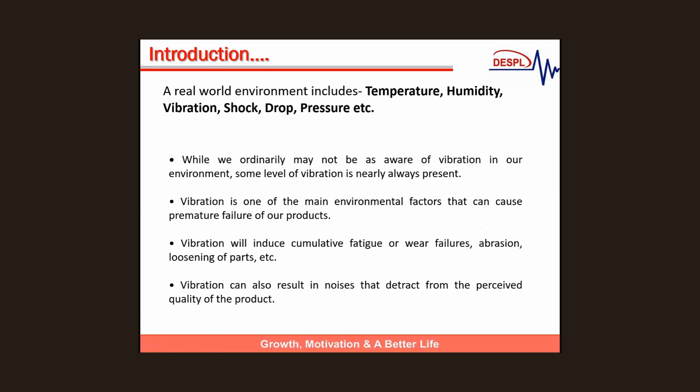Then the R&D and quality manager, the concerned persons over there, called us and discussed this problem they were facing. We have very big issues nowadays because we have produced thousands of bikes, and everywhere we go we get this complaint from our dealers and from our suppliers. So please suggest how we can come out from this problem.

Then I analyzed each and everything and came to the conclusion that they had not tested, had not simulated the actual environmental conditions which the bikes face on the road. So we collected all the data, amplified it some 2-3 times, and suggested they go for an electrodynamic vibration shaker system.

Earlier what they were doing was a simple mechanical type of vibration test rig, having a maximum of 250 Hertz. I suggested they go for an electrodynamic vibration system, capture the actual data on the road, and simulate it by amplifying it 2 or 3 times.

They procured the system and did the same thing, and the test gave a number of outputs to them. After that, they changed the design, changed the material, changed the fixing arrangement, and a lot of other things. This vibration machine told them exactly what they needed to do, one by one.

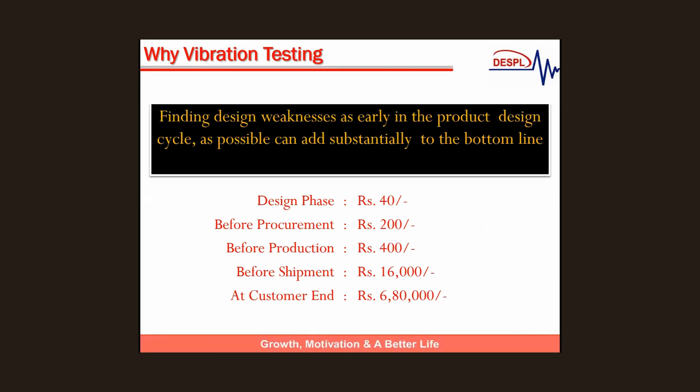So there are a number of stages - the design stage, production stage, after assembly, and then final - where we can do environmental testing, this vibration test. This is the cost effect which impacts the product. So it is always better if we design our product and test it, simulate the conditions, so that we should not have problems when the products reach the customer end.

Now, if we are talking about what environmental conditions we have here on the earth...

And what are the effects of different environmental screening conditions on the product? So major conditions is like temperature cycling. We have products which we are using at minus 20 degrees also, and sometimes it is going up to 60 degrees, sometimes 70 degrees, and when it comes to automotive kind of components, the temperature goes more than 120, 130 degrees also.

So what is the impact of temperature? That is the main important point over here. If we are talking over here, it is like temperature. Temperature is having a big impact on the product.

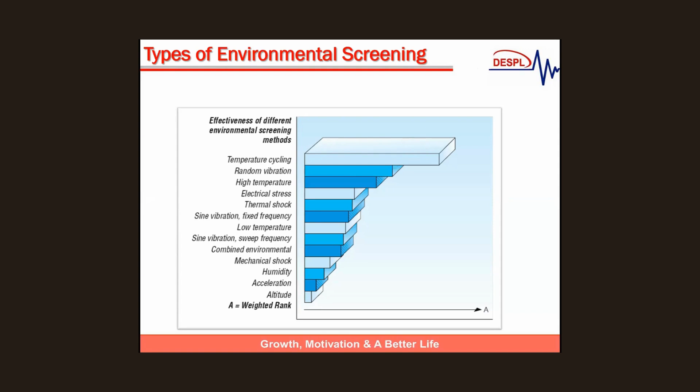After that, there is vibration, random vibration, then high temperature, electrical stress, thermal shock, sine vibration fixed frequency, then low temperature, sine vibration sweep frequency, combined environment, mechanical shock, humidity, acceleration, altitude. So these are the ranking of the environmental conditions which impact the product.

When we are talking about the percentage of failure on any kind of product, vibration stress is somewhere around 45%. Compared to all other effects, this failure percentage is very much higher than others like temperature, hot and cold, and others. And 20% is like combined environmental stresses.

Nowadays the trend has changed. Whenever we have a product, we are not only simulating vibration, we are simulating the combined condition - vibration, temperature, and humidity, and sometimes altitude also.

So percentage-wise, if we see over here, the failure percentage by vibration is very, very high. That's why it is very important to have vibration testing before producing any kind of final product.

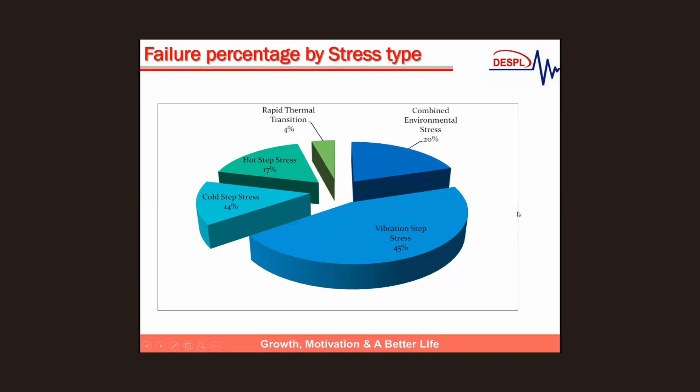Now, I think most of the guests over here are very much aware about vibration testing. Some of them are already doing the test, so they are very much familiar with what vibration test is and how they are simulating things on the product.

As we discussed, why is this vibration testing important? We already discussed that. It plays a very crucial role in product development and quality assurance, just like detecting structural weakness. I gave an example of TVS - there was a lot of issues particularly with the structure, so they modified that and overcame the problem.

Then product reliability and compliance with industry standards. There are a lot of industries who have their own test standards, and they are qualifying their product as per their norms and testing standards.

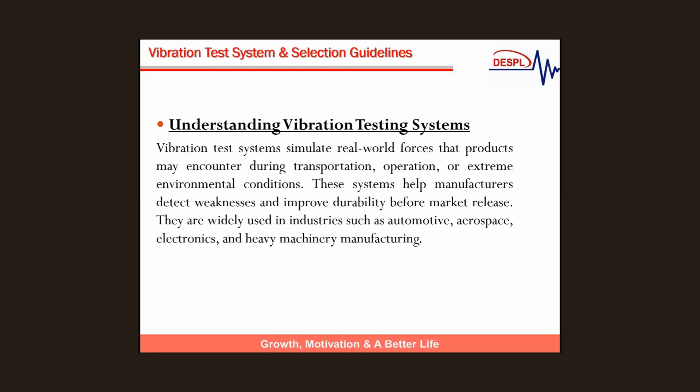In case we have all these kinds of testing before launching our product, there will be very less problems, particularly when we are talking about warranty period as well as after warranty. So that will give confidence to the customer. That's why this vibration testing is very, very important for the product we are manufacturing.

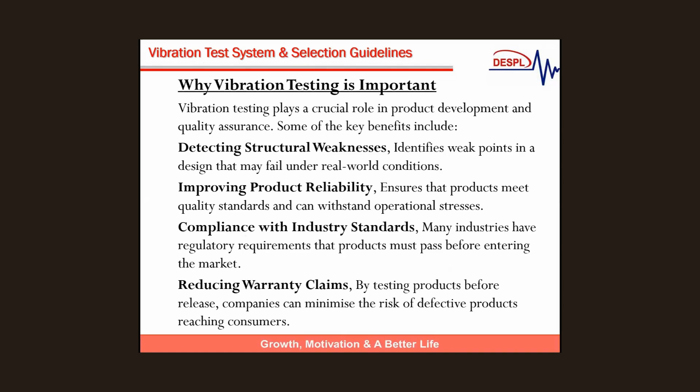When we have a requirement of vibration test, the important point is how we can select a suitable vibration test equipment. What are the important factors? What are the important parameters which will guide us to have a suitable capacity and suitable subsystems along with the vibration test equipment?

So there are some factors over here. First of all, we should know what kind of test we want to conduct. There are different types of vibration test, like sine vibration test, random vibration, sine on random, random on random, shock, SRS, RTH, LTH. And sometimes users simply capture the data from the road and apply it to the product.

Just amplify it 2 times or 3 times and apply to the product. So there are different types of vibration test. First of all, let us decide what kind of vibration test we want to do.

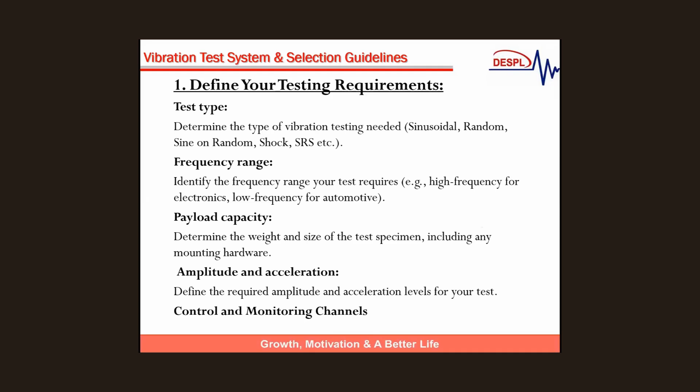So this is a very simple example I have given. When it comes to defense kind of products, there are a lot of other high-level, high-end monitoring and analysis things involved. So the number of channels of the vibration system depends on the type of product and the type of testing we are going to do. This is very important - we have to define what kind of testing we want to do. Only then will we be able to decide which equipment we need to fulfill our requirement.

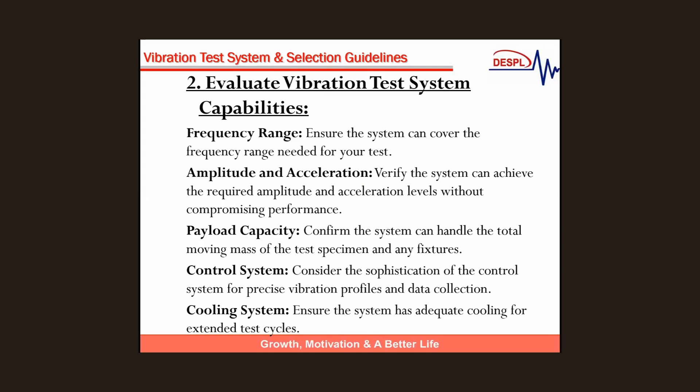Once our requirement is final, then we think about the vibration system. A current carrying conductor senses a force, and the direction of the force will be according to the direction of the current. For example, when we are doing a sine vibration test, the sine starts from 0, goes to maximum, comes back to 0, then goes to negative maximum, then comes to 0 again - so it is an alternating signal: 0, maximum positive, then 0, then negative maximum, then 0. According to this, we have a force which allows the movement of the conductor inside the magnetic field. So this electrodynamic vibration system works on Fleming's left-hand rule of electromagnetism.

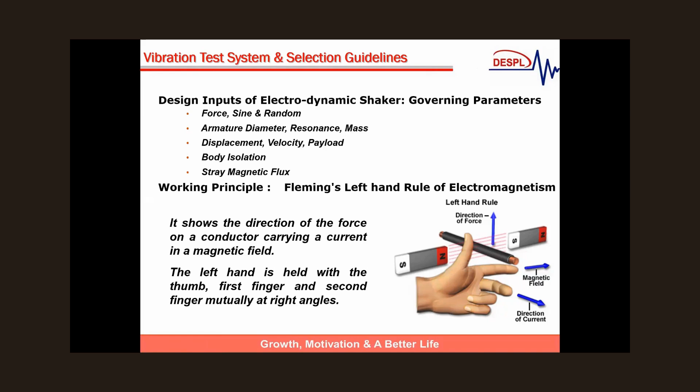Now these are the vibration shaker system selection guidelines. The major important parameter here is the force rating of the electrodynamic shaker or any shaker. The force rating needs to be calculated according to the test level in terms of acceleration, and the total mass, the weight of the DUT along with the fixture.

Force is equal to mass multiplied by acceleration. So force rating is very important - first let us decide the force rating of the equipment. That is very simple: calculate the total mass we want to test and the maximum acceleration level we want to test, then just multiply both. It will give the force rating of the electrodynamic shaker system.

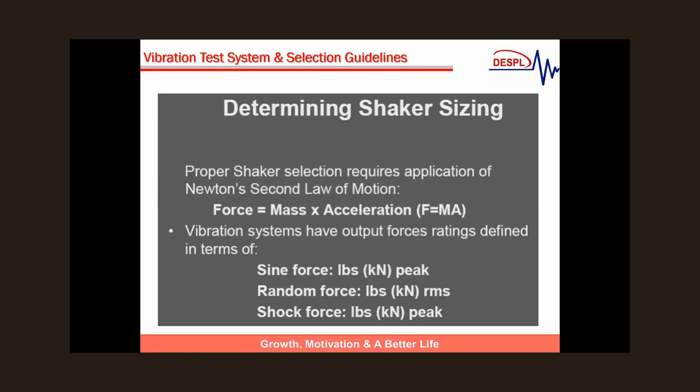Then the maximum displacement and maximum velocity are two other important parameters. These depend upon the test. Sometimes we have very high displacement kind of testing and G also, so that requires high velocity. So is our system compatible to give that much displacement as well as velocity? This is simple actually. The main thing over here is the force, and along with force rating we are discussing displacement and velocity. So according to test requirement we can define the velocity as well as displacement.

Same thing, moving mass, F is equal to m into a, for determining moving mass. The mass given in F must include all moving mass attached to the shaker armature surface, including the armature mass itself, shaker armature, head expander, slip table, drive bar, test specimen, interface fixture, including bolts, bearings, etc. That will be the total mass.

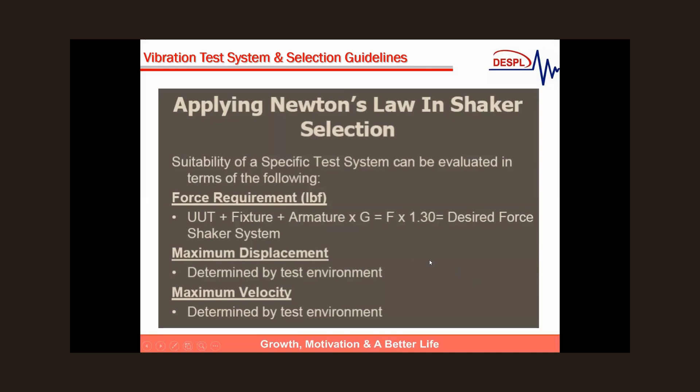Then this is also a very important parameter: what kind of shape of the product we want to test. That is also important - what is the dimension, what is the CG (center of gravity) of the product, and how we are mounting that product with the fixture. That is important, because in case we are not keeping the CG of the product with fixture in the center of the equipment, then it will have a lot of issues with the armature, that moving internal part of the machine. To avoid that CG problem, we should have a guided kind of platform, so that it should not impact directly on the armature. So this is also very important - what kind of specimen specific we have - that we need to consider while selecting a vibration test equipment.

These formulas are very simple. I think most of you may be knowing that velocity is 2 pi f d, acceleration is 4 pi square f square d divided by 9810. V is velocity, A is acceleration, F is frequency, D is displacement.

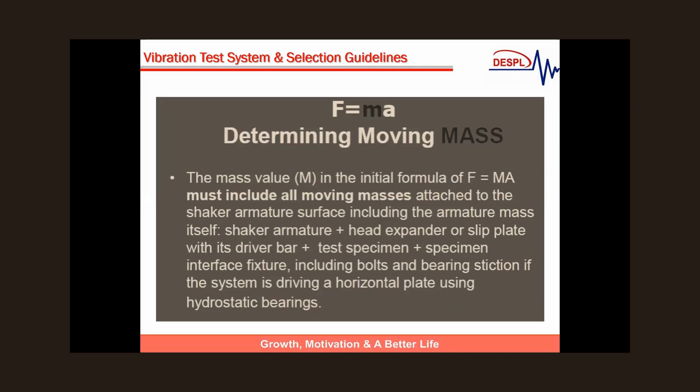Now we are discussing how we should have a smart vibration lab. Nowadays, the trend has changed. Earlier, we had this equipment here, that equipment there, and we were doing testing here, there, this thing, that thing. Now things have totally changed. Now it has become very advanced, integrated, and different kind of things.

We should have a combined environmental test lab having all kinds of equipment. It may be having a vibration machine, an environmental chamber, and then pump test, soak test, centrifuge machine, thermal soak, etc. Each and every time we need to use some equipment to test for a number of hours - 200 hours, 100 hours, 300 hours, 400 hours also. So each and every time there is no need to go to the lab and set each and every equipment according to this, because there will be a lot of interruptions over there - power failure, this failure, that failure.

So in that case, what is the solution? We have a smart vibration test lab along with other equipment, where we have equipment at one place and a control room at another place. From the control room, we can monitor everything happening inside the environmental test lab, and even control, including test start and stop, and monitor other safety parameters. We can do whatever we want by setting up a control room. There is no need to go again and again to the main test lab for each individual equipment. So that kind of facility we have developed and we are delivering to the customers.

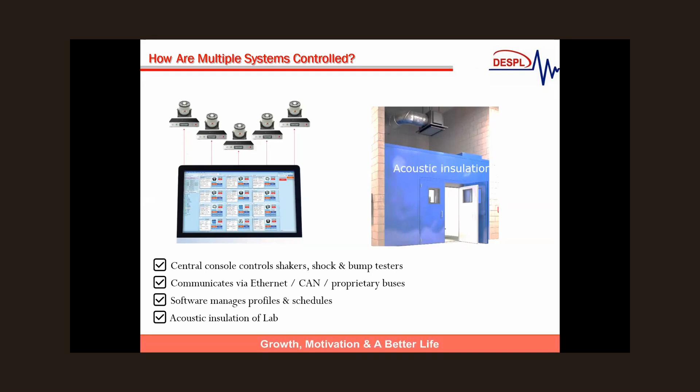So these are the features of the smart lab we have: centralized console controls shakers, shock and bump tester, which we communicate through the Ethernet and our proprietary buses, software profile and schedule, acoustic insulation of the lab. So this kind of remote access we have of the complete environmental test lab - by sitting in a control room, we can do whatever we want to do.

These are the key factors. This advanced laboratory, what we are going to have.

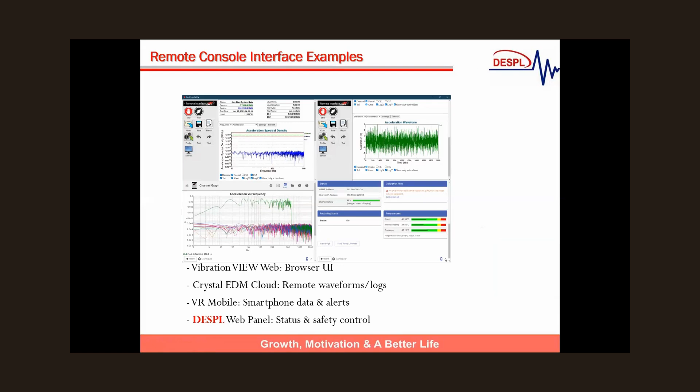Now again, I come to the selection of the electrodynamic vibration test system, and I have given one example over here, just to have a suitable vibration test system. For example, we have a test requirement which is having a frequency range of 5 to 2 kilohertz, and the vibration level from 12 mm displacement and 10 G. And DUT weight along with fixture is somewhere around 50 kg and size is somewhere around 800 into 700 into 400.

So when we have this test requirement, let us see what kind of vibration test machine will be suitable to fulfill this test requirement. So here let us discuss the platform size first. Since the DUT size is 800, 700 and 400 along with fixture, for mounting this DUT, we should have at least a minimum 1000 into 1000 mm platform. And when we have a 1000 to 1000 mm platform of magnesium alloy, which is the lowest weight material, the weight of the platform will be somewhere around 120 kg.

Here it is very much clearly defined the level of the vibration here, which is 10 G. So now if we put the formula and calculate the total mass: 120 kg is the platform weight, 50 kg is the DUT weight, plus the internal weight of the shaker, that's called armature. So it comes to 170 plus armature. Now, as per the formula we discussed above, force is equal to mass into acceleration. Mass is 170 plus armature, into acceleration level which is 10 here. So it comes to 1700 plus armature into acceleration level.

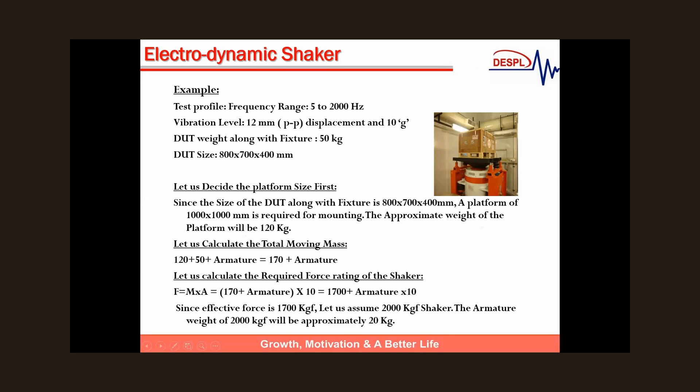The armature weight of a 2000 kgf system will be approximately 20 kg. If you put the actual values to calculate the required force: 1700 is the effective force plus 20 kg is the armature, and the level of vibration is 10. So this becomes 200, plus 1700, it is 1900 kgf. If we put a 20 to 30% safety factor over here, it becomes 2470 kgf. So it means equipment having a capacity of 2500 kgf will fulfill the requirement of our test.

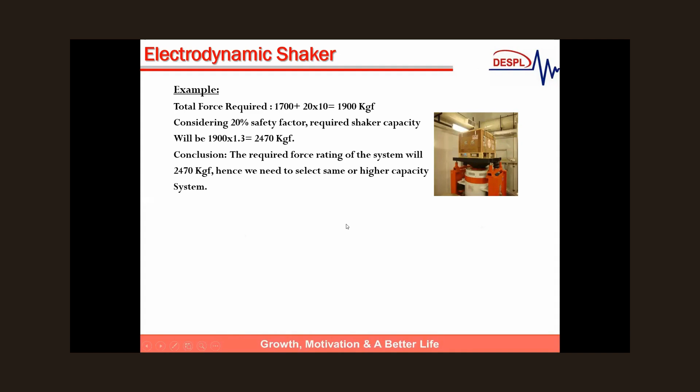So this way we can calculate the capacity of the equipment according to the requirement.

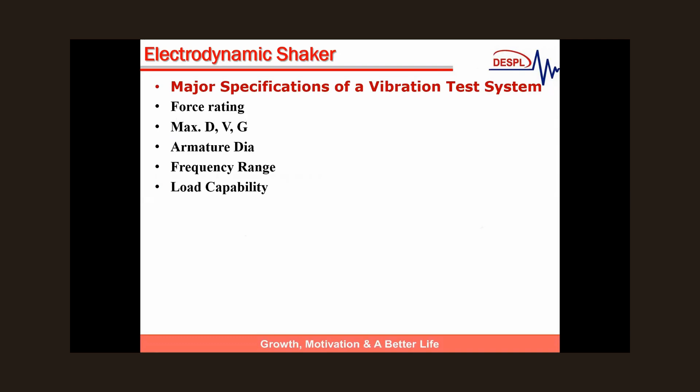As we discussed, what are the major specifications of the vibration machine? First, force rating, which we already calculated in the previous screen. Then second, maximum displacement, velocity and acceleration. Then armature diameter, frequency range, load capacity, power amplifier capacity, and number of channels, control channels with the software - sine, random, sine on random, RSTD - whatever kind of test we have. So these are the important parameters.

According to the number of channels we select for the vibration controller, we should decide the number of accelerometers. Then according to the size of the product along with fixture, we should decide the size of the slip table for X and Y axis, and similarly for vertical axis, the size of the head expander. So these are the key factors of the vibration shaker system.

And sometimes in case we have a combined vibration test requirement along with the environmental chamber, we should have thermal barriers.

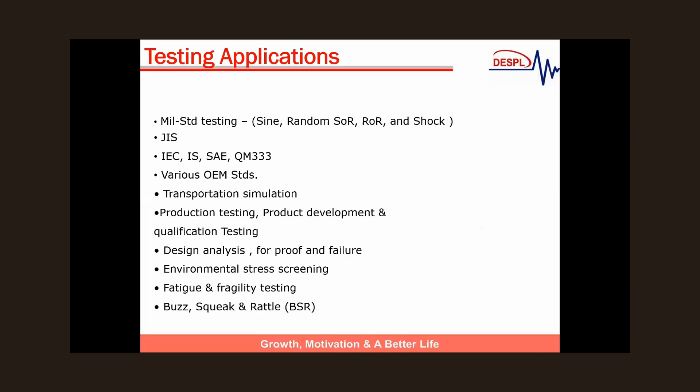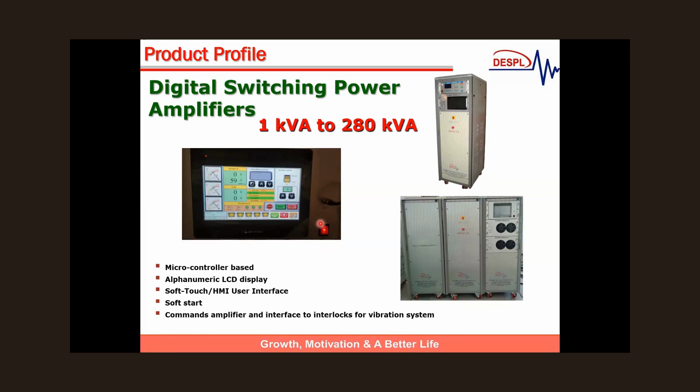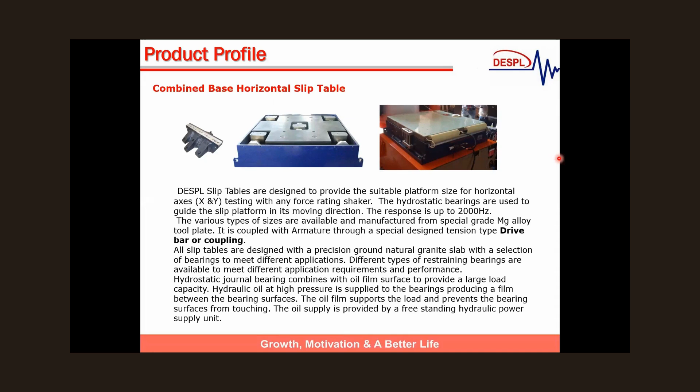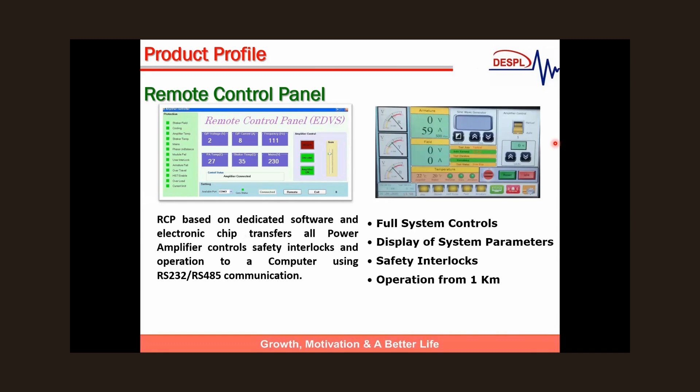We have this bump testing shock test machine, pneumatic shock test machine, and our shock test machine is designed up to the level of the machine we supplied in Vietnam - somewhere around 20,000 G. So we can design as per customer requirement. We have from 5G to 20,000 G, and platform sizes from 300 by 300 to 2 meter by 2 meter.

According to the requirement, we can design the shock test machine, and it can be combined with the bump test machine - shock as well as bump, both features combined in a single test machine. So there's no need to go for a separate bump test machine; both tests, shock as well as bump, can be done with a single bump and shock test machine.

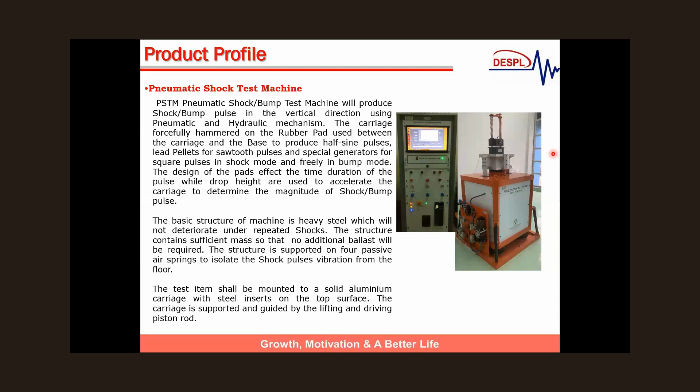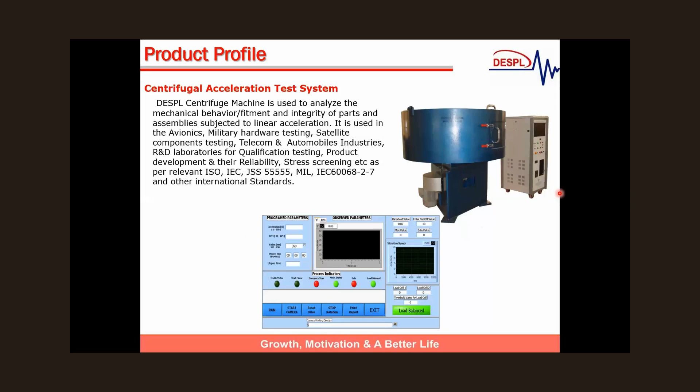Then we have a centrifugal acceleration test machine, which we have installed for very prestigious customers like Godrej, L&T, and HCL. There are a number of centrifugal machines we have even exported. This is also having the same kind of features - it can be accessed and controlled through a remote control panel by sitting in a remote control room.